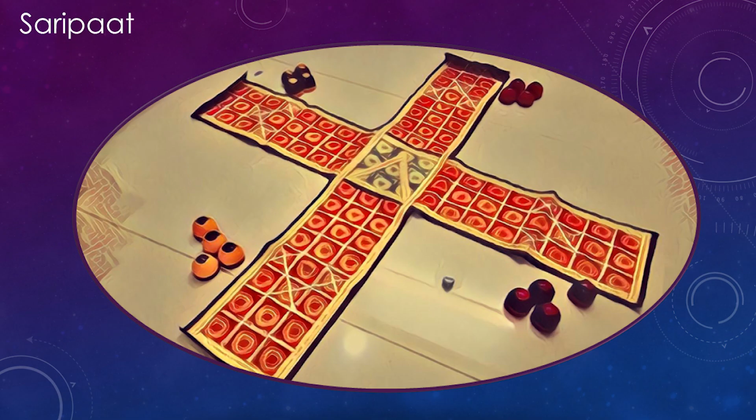To answer this, let me tell you the story of a game. Saripaat, as it is called in Marathi, is an ancient Indian game. It dates back to more than 5,000 years ago during the times of Lord Krishna. A different version of this game was played by the Kauravas and the Pandavas in the Mahabharata. In Hindu mythology, it is also a game enjoyed by Lord Shiva and his wife, Goddess Parvati.

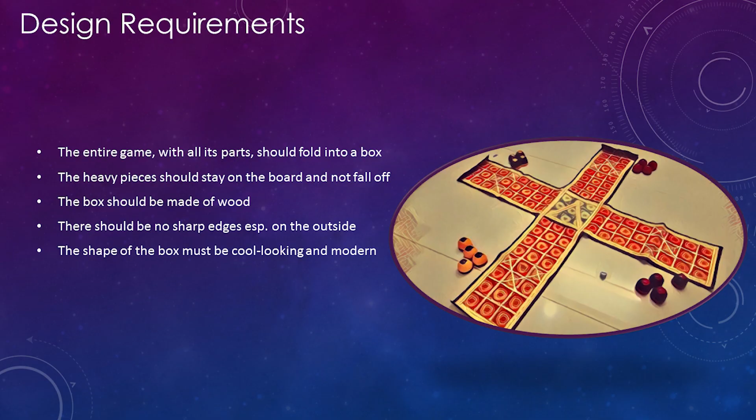So I wanted to introduce this game to my children, but I wanted to modernize the design. These were my design requirements. I wanted everything, all the pieces, to fit into a box. I wanted the pieces to stay on the board and not fall off while playing. I wanted it made of wood. I wanted the entire design to look sleek and cool, and I didn't want it to have any sharp edges on the outside.

Clearly, the current level of AI has not evolved to the stage where it can just take my design requirements and give me the final design in a single step. But there is AI to help you along the way throughout the entire design process.

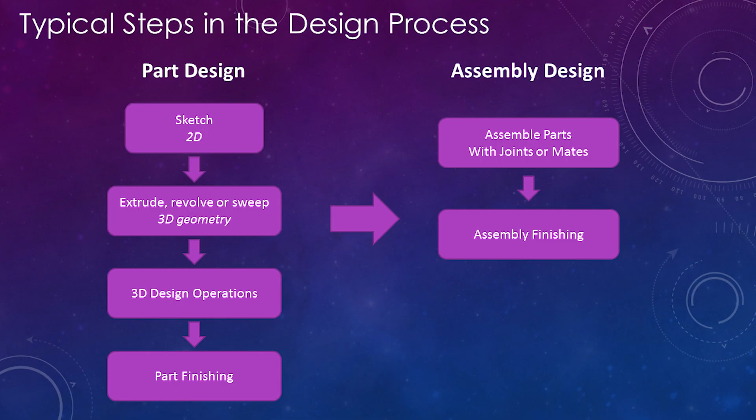Here is how the entire design process looks like. There are two main stages: part design and assembly design. In part design, you start out with a sketch, which is usually 2D. Then you convert that sketch into 3D using some of the operations like revolve, extrude, sweep. Then you do more 3D design operations, and then you apply finishing touches, and you repeat the same process for other parts.

Once you are done designing all the parts, you move on to assembly design. In assembly design, you join these parts together with joints, or mates as they are called, so that they stay in position at the desired location. And then you finish with the assembly.

For complicated designs, each of these stages can involve many tedious steps and many repeated steps. My team has done great progress in using AI to reduce the tedium from the conventional design process, and I want the world to know about it.

What I'm going to do is show you the steps that we use in the next video. So for Saripaat, I had a design in mind.

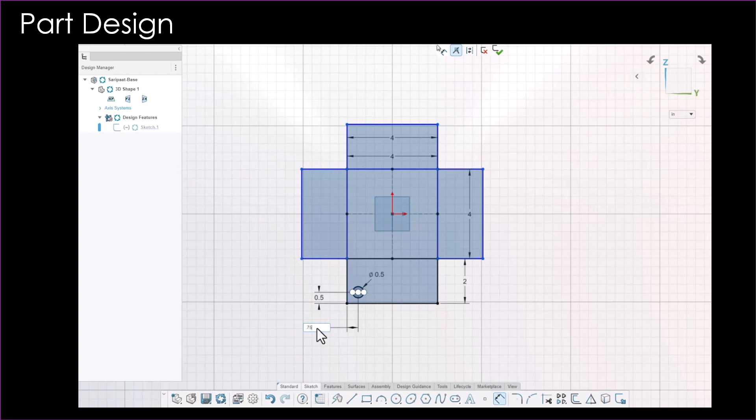That would meet all my design requirements, so I started with a sketch. As I was sketching, the AI-based design assistant was helping me, understanding my design intent and creating entities as I needed. Every time I created a new entity, it created other entities automatically for me. And with the help of AI, within no time, I had the sketch ready.

Once I extruded that sketch and made a 3D part out of it, I removed material from the center. And then I was able to give it a smooth shape by selecting almost 50 edges with just a few clicks using the AI-powered design assistant for selection.

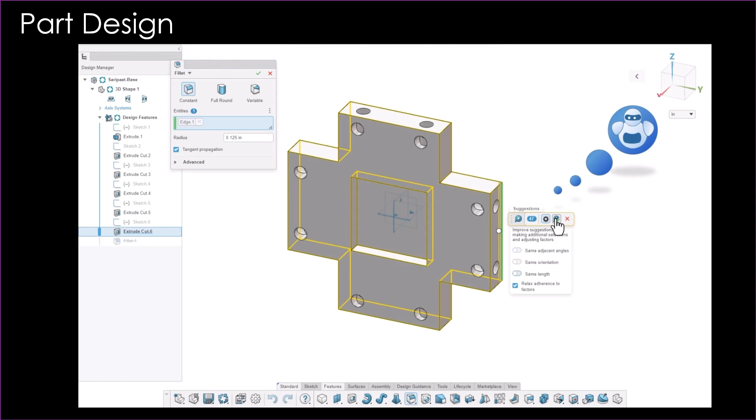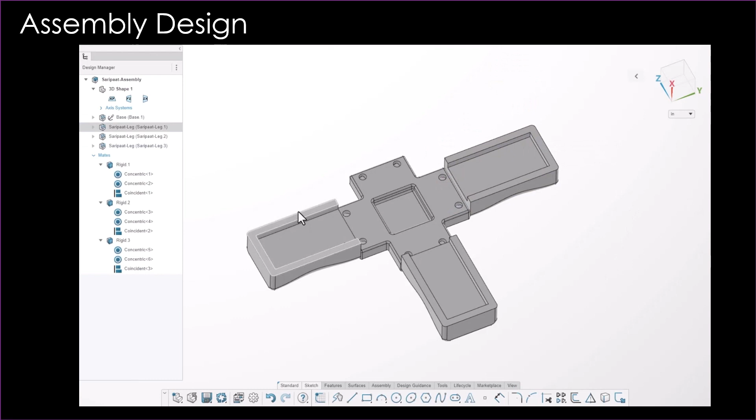Once the parts were designed, putting the assembly together was a snap using AI. All I had to do was drag the parts together so that mates were created smartly by the AI-assisted design assistant for mate creation. As various mates were created, the design tree was updated. Usually, creating mates is one of the most complicated steps in the 3D design process, because the user has to manipulate the parts in 3D and then select the proper geometry to define these mates. But with the help of AI, it was effortless.

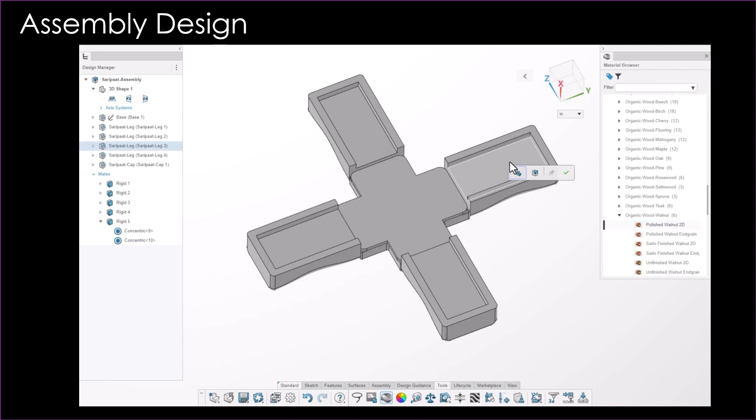Then all I had to do was apply material and apply my design to the top surface of the board, and my design was ready. Once it was folded together, it had a nice cool look that I was looking for, and I was done with my design. Now, even though AI was there at every stage of the design, it took care of all my complications or all the difficulties that I was going to encounter.

It made the entire process look very easy. So for all you hobbyists out there, if ever you wanted to design any of your pet projects but were intimidated by the complications or complexity of the 3D design tool, I want to remind you to take another look at the latest generation of AI-powered 3D design tools that can make complex projects far more straightforward.